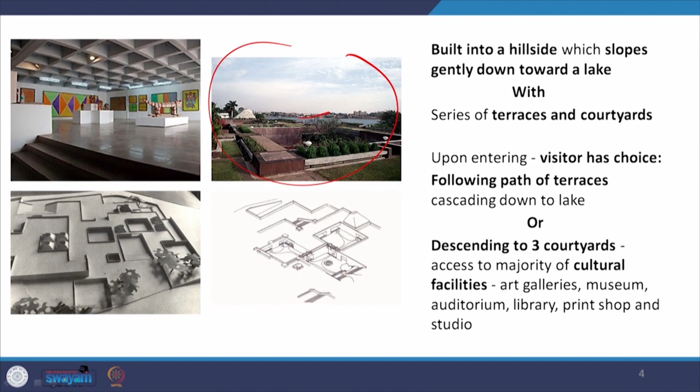Because he will have to bring in levels in his building, he will have to create that sight and view of the Bhopal Lake, as you see here in this picture out there in the distance, which is going to govern the design of the Bharat Bhavan. He is not coming to the site with an imaginary Bhavan in mind. He is coming to the site and then imagining the Bhavan that will fit onto this site.

Am I speaking the language of Frank Lloyd Wright? Am I not saying the house must be not on the hill but of the hill, that the building must respond to its location, its topography, its climate, its vegetation, its available materials? My design should not be a preconceived hypothesis. My design should be a result of the existing conditions that I see when I go see the site and study the conditions of that region. Then should the image of the design start floating in front of me. There is no doubt that all architects have some general idea of the building they want to do when they start thinking about it.

But it must be greatly tempered by all these conditions. And thus it was tempered.

Bharat Bhavan is an iconic building, so low key that it really doesn't even have a proper elevation. I've been trying to find one shot that would define the elevation of the building. It doesn't exist. It is just a series of levels interconnected, with sunken courtyards and terraces. That's all there is, and within that the entire Bharat Bhavan has been put together beautifully. There are a couple more projects of Charles Correa we reflected on earlier, which are the predecessors of this project.

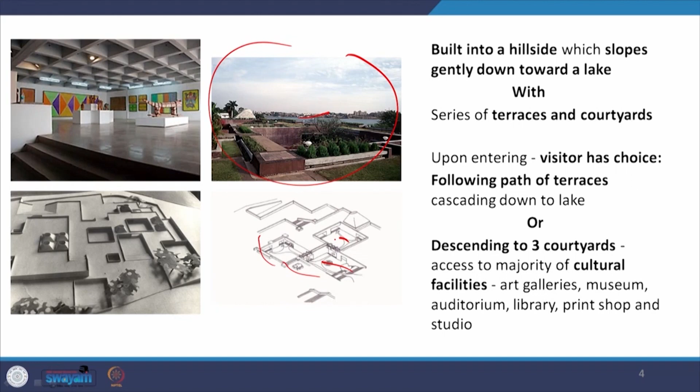Here the building is built into a hillside which slopes gently down towards the lake, creating a series of terraces and courtyards. Upon entering, the visitor has a choice: follow the path of terraces cascading down towards the lake, or descend into the courtyards to access the cultural facilities - the art galleries, museum, auditorium, library, print shop and studio. This is a picture of one of the sunken art galleries.

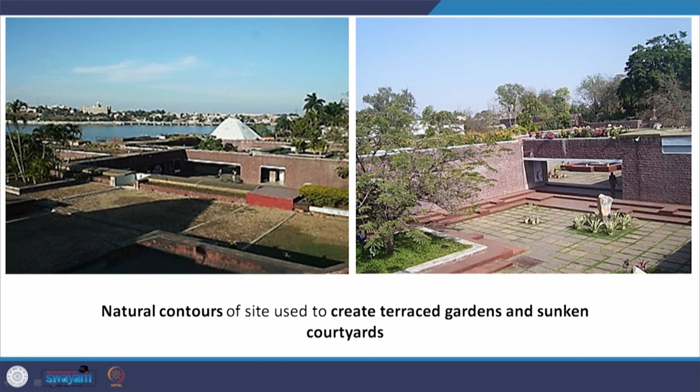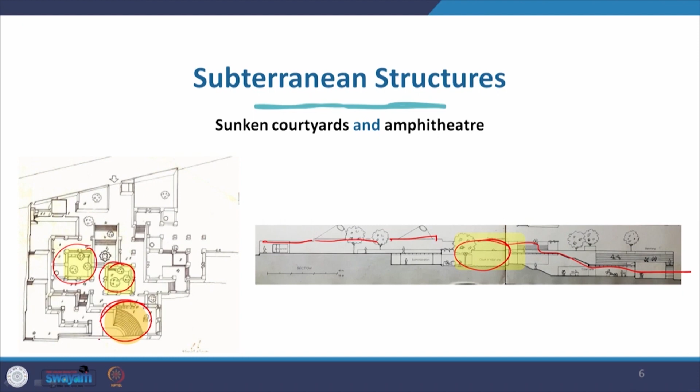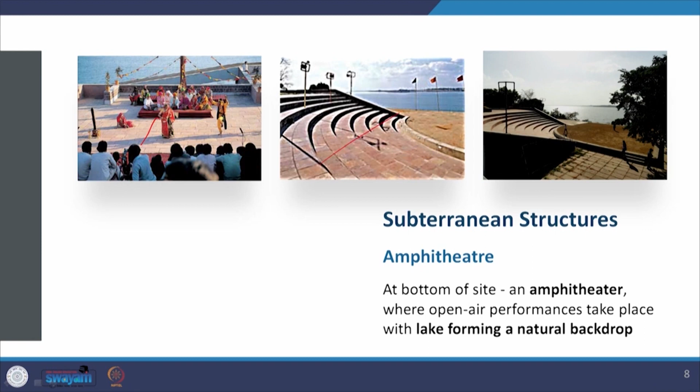The natural contours of the site were used to create these terraced gardens and sunken courtyards - a terraced garden looking down into a sunken courtyard. Looking at the subterranean structure of sunken courtyards and a sunken amphitheatre in section, this shows the sunken courtyard and the terraces you follow going down towards the lake. In plan, these are the courtyards and the amphitheatre, which you see on site with a play going on, looking towards the lake at the bottom of the site, with open air performances taking place and the lake forming the natural backdrop.

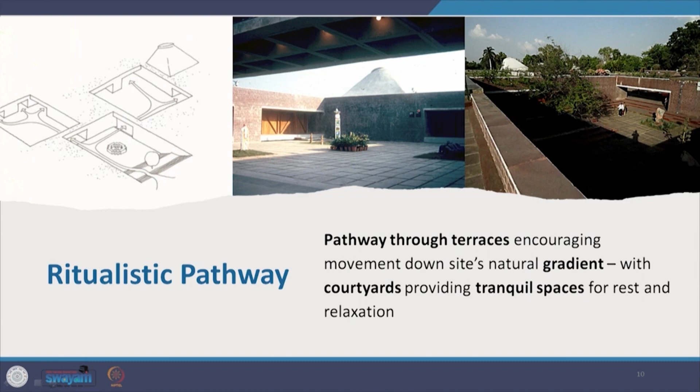These are the galleries that open up from the sunken courtyards. There's also the idea of the ritualistic pathway - as I discussed in previous lectures, Charles Correa uses the pathway movement of a temple, palace, or village, that ritualistic movement, to create movement within his building. I mentioned an earlier museum where he used this concept. Here too, the pathway runs through terraces, encouraging movement along the natural gradient of the site, with courtyards along the way providing tranquil, relaxing spaces to sit and rest.

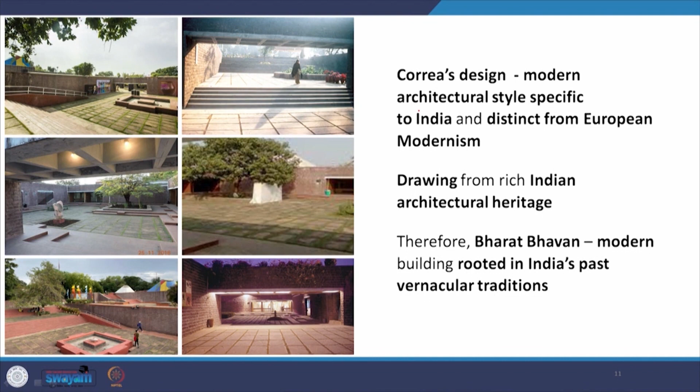So Correa's design is a modern architectural style specific to India, distinct from modernism for Europe - this is modernism for India. It draws from India's rich architectural heritage. Bharat Bhavan is a modern building rooted in India's past vernacular traditions - open spaces, courtyards, terraces, the chhat and the angan - all playing their role. It is well suited for contemporary society, with familiar architectural motifs responding to the man of the 80s, while taking significant steps toward a distinct Indian modernism. These are some of Correa's other buildings.

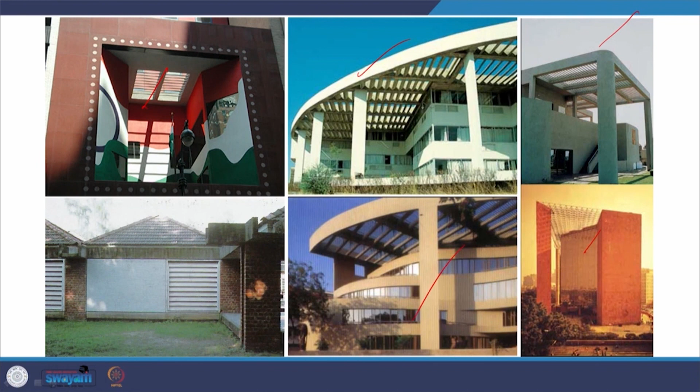This is the consulate building he did in New York, which I have studied with you. This is in Mauritius, this in Bangalore, this is IIT Delhi, and this is the Gandhi Smarak Sangrahalaya.

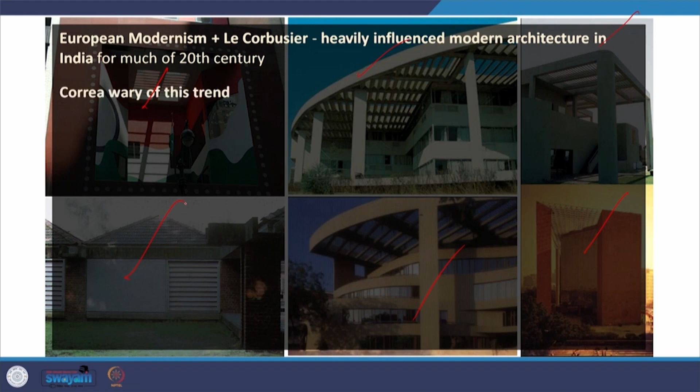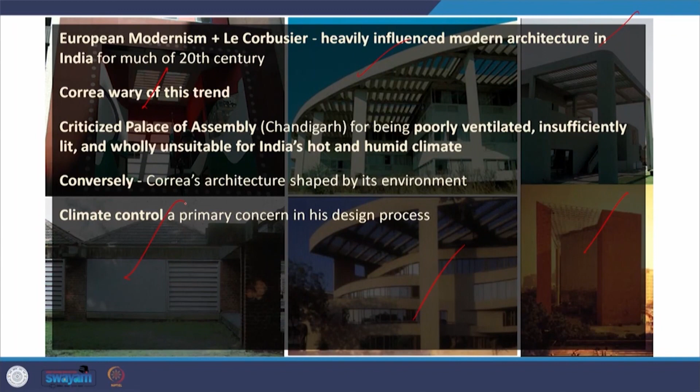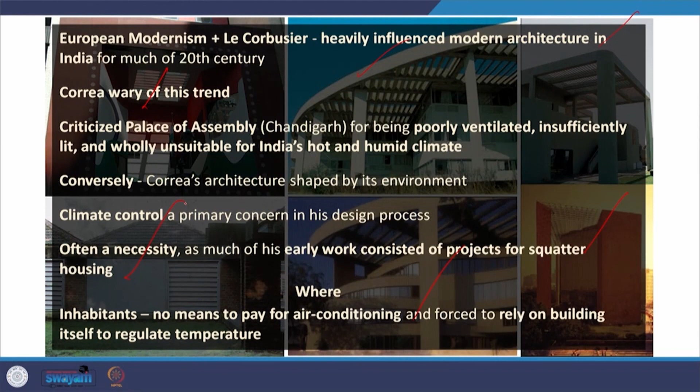But the important point is this: European modernism and Corbusier heavily influenced modern architecture in India for much of the 20th century. Correa was wary of this trend. He criticized the Palace of Assembly for being poorly ventilated, insufficiently lit, and wholly unsuitable for India's hot and humid, or composite, climate. Conversely, Correa's architecture is shaped by climate and environment - climate control is of primary concern in his design process, often a necessity, as much of his early work consisted of projects for squatter settlements, where inhabitants have no way to pay for expensive air conditioning and must rely on the building itself to regulate indoor temperature.

This idea was not restricted only to squatter development. Whether he designed the Ramakrishna house or the Parekh house for the rich, or the Kanchanjunga apartments for high income groups, he resorted to the same passive techniques to make houses thermally comfortable without dependence on air conditioning. Was air conditioning still used? I believe so, but not to the extent it would have been required had these principles not been applied.

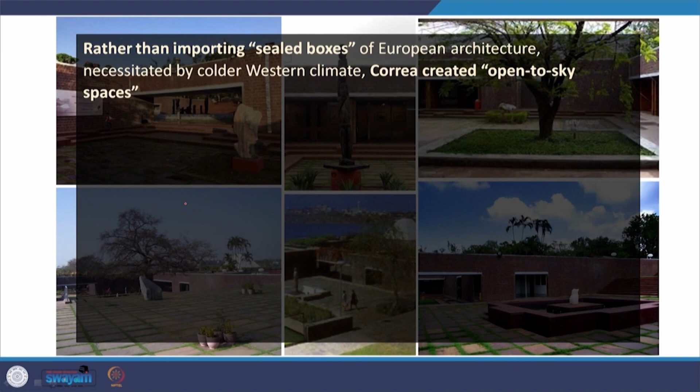Rather than importing sealed boxes of European architecture, which was necessitated by the Western colder climate, Correa instead wanted to create open-to-sky spaces so vital in India. I do not know whether the young generation gets to see these open-to-sky spaces in the upcoming urban centers of India, but when I was growing up, when I saw Delhi and other places, I saw so many open-to-sky spaces deliberately created.

It was part of our lifestyle to spend evenings outdoors in summers and even in winters. When you go out to play in the maidan or the ground or whatever green space the city afforded, much of family life was spent in the veranda, on the terrace, or in the maidan, either early mornings or late evenings in summers. In winters also, there were specific times when we could spend time outdoors.

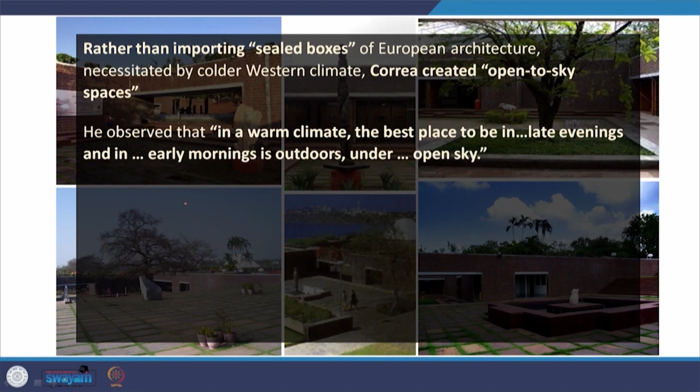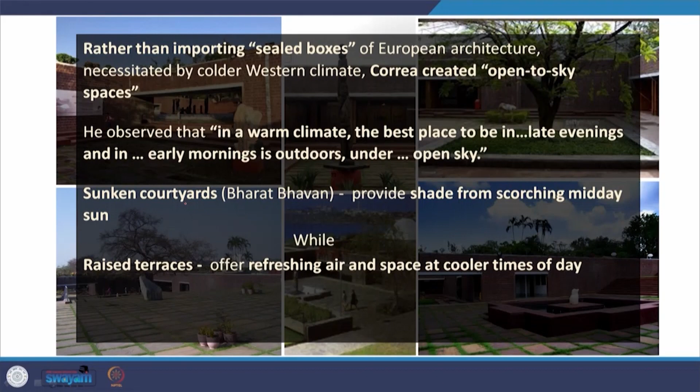He observed that in warm climate, the best place to be in late evenings and early mornings is under the open sky. Sunken courtyards, as you see in the Bharat Bhavan, provide shade from the scorching midday sun, while the raised terraces offer refreshing air and space at cooler times of the day—exactly what they were supposed to do in the various mohallas and gullies of, for example, old Delhi, where the chhat was the place people used to sleep at night.

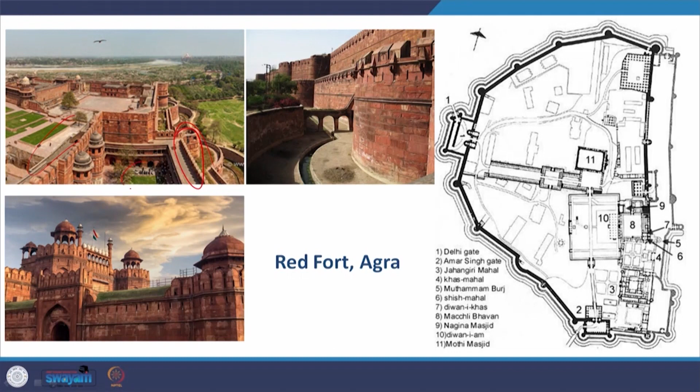This climate control solution in India's architectural history was inspired by the courtyards and terraces found even in the Red Fort. So when we go to the Red Fort, we find the same thing happening—terraces, courtyards, all these spaces being brought in because this was the vernacular response to the climatic conditions of the region.

Correa says there is nothing so moving as stepping out into an open-to-sky space and feeling the great arch of the sky or looking out towards the horizon. At Bharat Bhavan, it is intended that those emerging into the courtyard undergo this similar dramatic spatial experience of coming outdoors and being able to see the arch of the sky, particularly as the sun sets in the late evening.

The subterranean structures are not just confined to being symbols of passive comfort or spaces derived from the existing topography, which he allowed to continue in that manner, but also because of using the mandala form in creating these sunken courts.

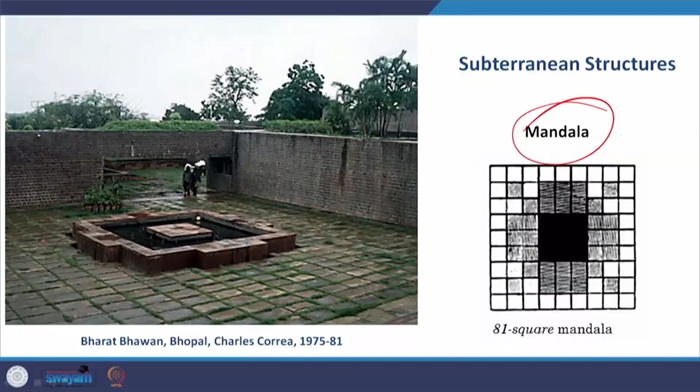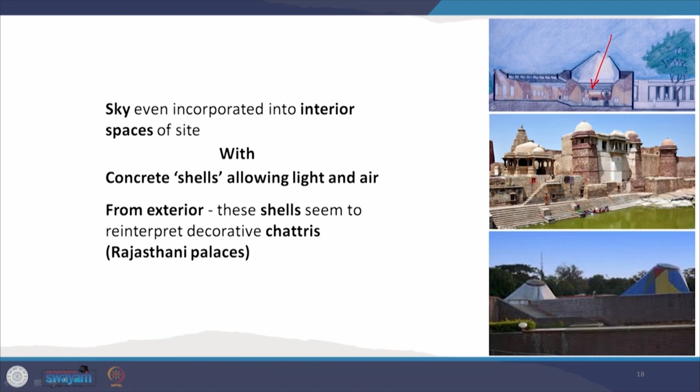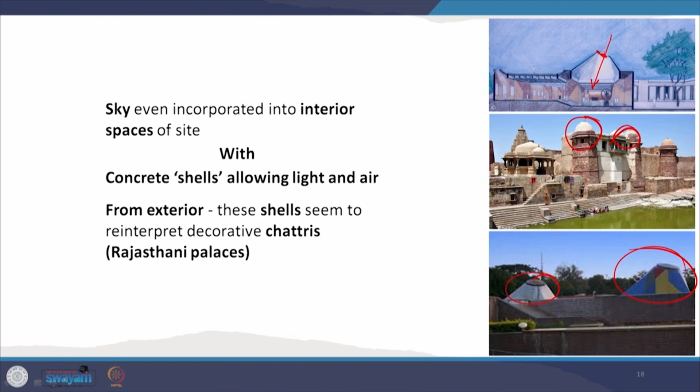The sky is even incorporated into the interior spaces of the site, pulling daylight into the deep interior areas through these concrete shells placed over the terraces, allowing light to filter into the deep areas. From the exterior, these shells are actually a reinterpretation of the Rajasthani chhatri, the only difference being this has an oculus, an eyepiece, to pull the light in.

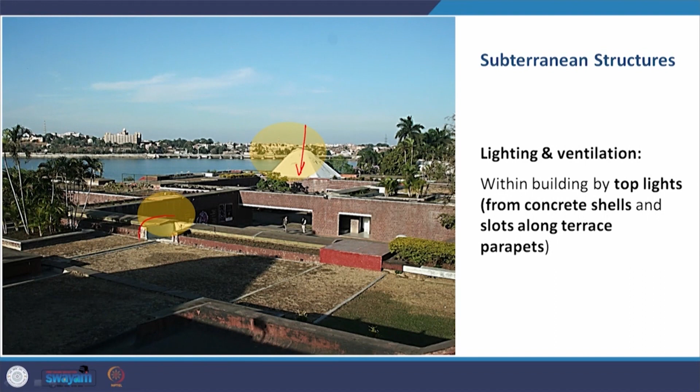So what we have for light and ventilation within the building are top lights from the concrete shells, and then there are small cavities, slots provided along the parapets of the terrace, which also take light deep inside the building below.

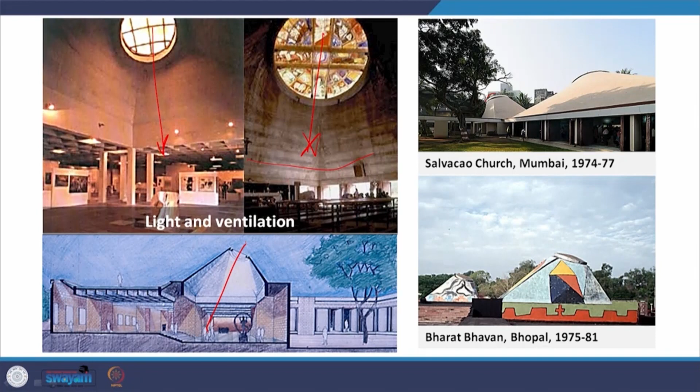From the courtyards, there are wide glass-panelled openings to ensure that the arts program displayed inside is accessible to all.

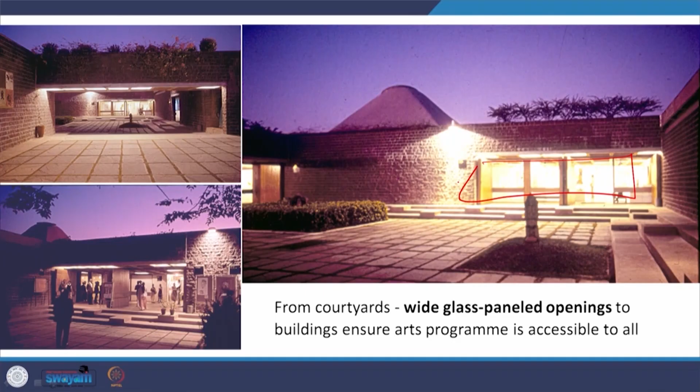The next project is on the other side of the climate spectrum. From composite climate, we move to the cold climate of Kashmir, with the Kashmir Conference Center by Joseph Allen Stein in 1984. This conference facility with a 325-room hotel adjoins the Dal Lake, whereas the earlier project adjoined the Bhopal Lake.

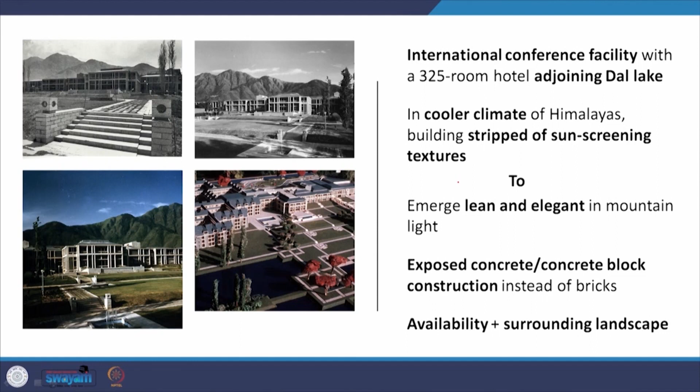In the cooler climates of the Himalayas, the building has been stripped of all sun-screening textures because we want the sun to penetrate the building. It is lean and elegant in the mountain light. It is made of exposed concrete or concrete block construction instead of bricks, which are not readily available in the mountains, but rocks are—reflecting the availability of material, with the surrounding landscape responding to this kind of material.

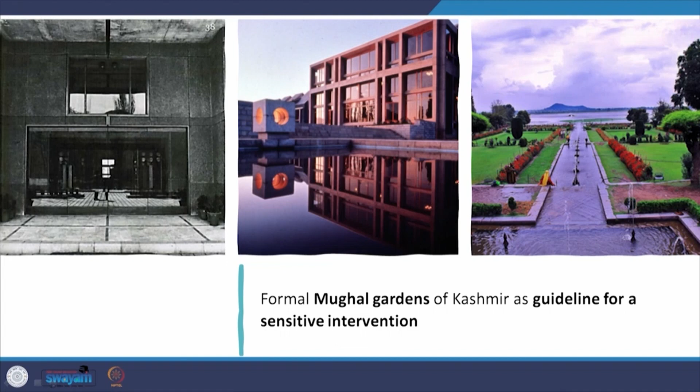The formal Mughal gardens, such as the Nishat Gardens of Srinagar, are a guideline for a sensitive intervention in Kashmir. But here again, he does not imitate them verbatim. Instead, he brings maximum sun into the building, something that probably Charles Correa or someone else wouldn't have done in a composite climate situation.

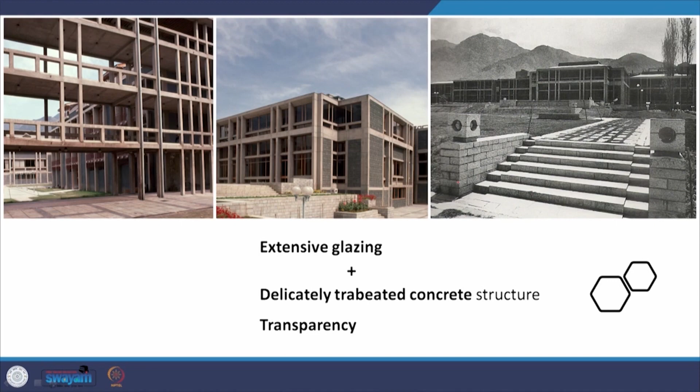He gives extensive glazing, a delicately trabeated concrete structure, and maximum transparency, all to pull in as much sun into the building as possible. Whereas in composite climate they were trying to keep out the sun and glare as much as possible, here climate changes, conditions change, building changes—it's to pull in the sun.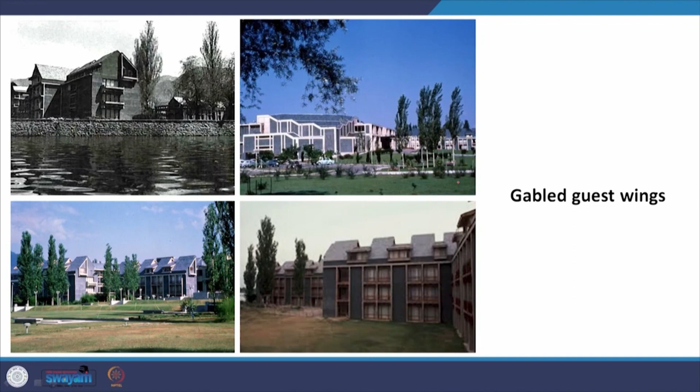Had it been an actively controlled building, I can say for sure the same building design of an active controlled building in Delhi could have worked equally well in Kashmir. The only difference being, from conditioning air for cooling, you can convert that to conditioning for heating. These are the gabled guest wings responding to the topography, the form of the mountains and hills behind.

Then we have this amazing composition in brutalism called the NDDB office building by A.P. Kanvinde in 1983. This is brutalist, but it is finished with white cement and rugged stone marble chip work. It is brutalist because it is rough cast work, an asymmetrical massing of blocks with receding irregular terraces as we go up.

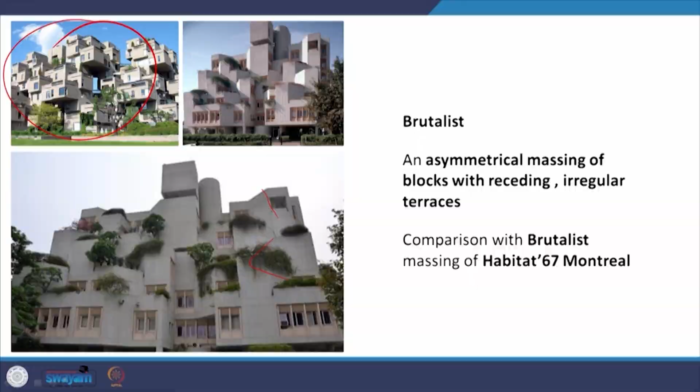The comparison of this brutalist work can be made with Habitat 67, Montreal, the project by Moshe Safdie—the housing project which also had a series of blocks placed asymmetrically over the entire composition.

This is an alternative to conventional office planning. The emphasis is on office worker amenities and an environmentally sensitive workspace. More exclusive functions than that of the chairman, the director's office, etc., are provided right at the top.

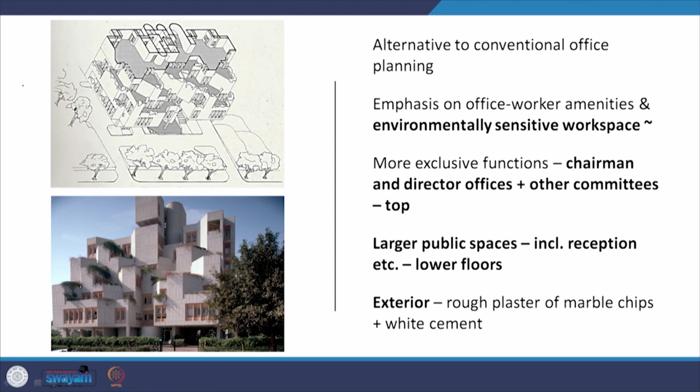The larger public spaces, including reception, etc., are on the lower floors, and the exterior is rough plaster of marble chips and white cement. The vertical services provided at the back of the building are kept separate—the fire escape, the main stairs, the elevator towers.

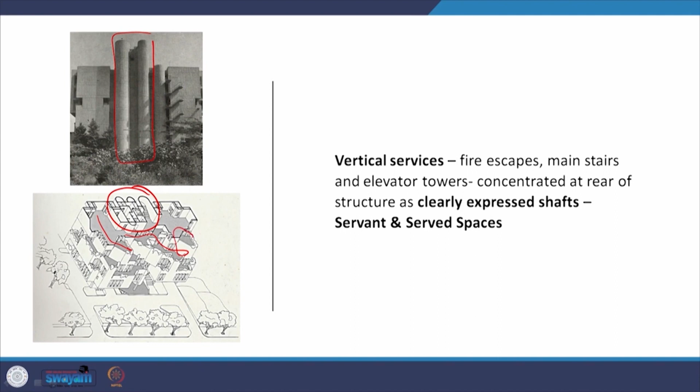So the served spaces and servant spaces are clearly defined. If you look at the plan—this is isometric here—you can see the servant spaces and the served spaces. So the ideology of Kahn, of servant and served spaces, also comes into play in this building.

Irregular terraces with hanging gardens have been provided, as you can see in this picture. These are the various hanging gardens of the irregular terraces. This is the view from above, showing these gardens.

This same idea of hanging gardens was later applied in 1997 by Norman Foster in the Commerzbank, where he called them sky gardens. They were not so randomly organized. In this case they are more asymmetrically, more randomly organized, whereas in the Commerzbank building they were more symmetrically organized—but we have these sky gardens all the way up the building.

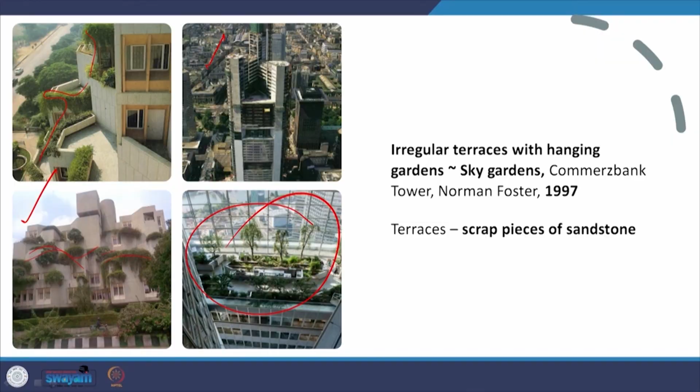I'm not saying he borrowed the idea from the NDDB building. I'm saying the NDDB building, the Commerzbank, and several others are part of the same chain of buildings that continue to apply vegetation even at higher levels. The idea of green roofs today, or gardens at high levels, are all precursors to an idea now firmly enshrined in our definition of what makes a green building.

Then we come to the Institute of Forest Management in Bhopal by Anant Raje, 1989. We are very close to the start of liberalization in India, and Anant Raje himself is one of the most talked-about modern Indian architects, a guru to several leading designers, and a great educator.

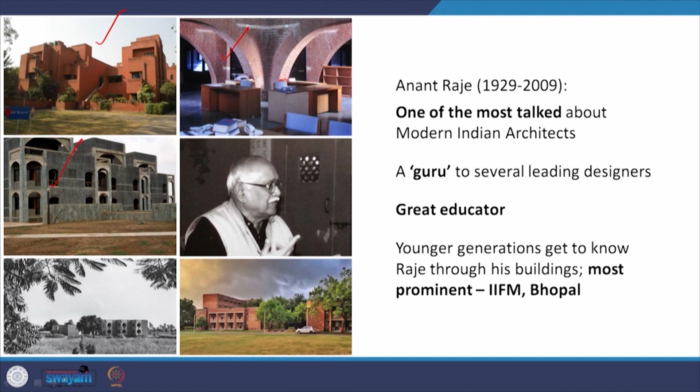Young generations get to know Raje through his buildings, the most prominent being the Indian Institute of Forest Management in Bhopal. So we have projects connected with housing—this is the MDC, the Management Development Center in IIM Ahmedabad, and this is the IIFM. There are other projects done by him in different places.

Here again, the site plays an important role—it is not leveled out, not neutralized, but used. It's a rocky site overlooking the Bhopal Lake, again as in the case of Bharat Bhavan. It is a combination of building and landscape.

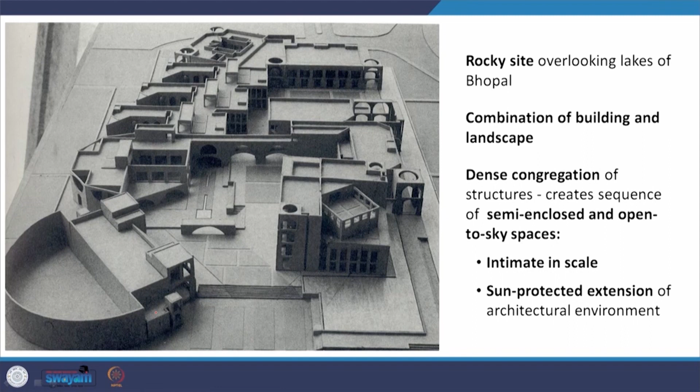Dense congregation of structures create sequences of semi-enclosed and open-to-sky spaces. They are intimate in scale, a sun-protected extension of the architectural environment. It is a large government project, as is Bharat Bhavan, as is the Kashmir Conference Center, and to a certain extent the NDDB building is also sponsored by the government.

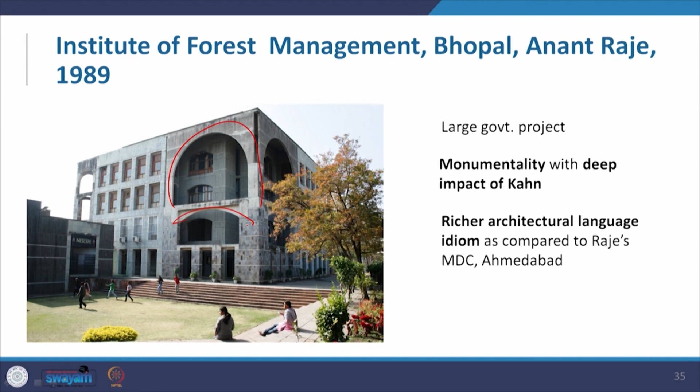In this case there is monumentality, but we see an overall deep impact of Kahn—for example, in elements like this, or in arches like this, all reminding us of Louis Kahn's IIM Ahmedabad. But it has a richer architectural language and idiom compared to Anant Raje's Management Development Center taught earlier, because this expands beyond just exposed brickwork to play with stone.

There is the idea of the palimpsest, the idea of the datum, the idea of the way forms have been created with a lightness of form he generates, instead of the heavy block massing he used earlier in the MDC.

The facilities are related to teaching, seminars, residences and recreation, and are set to promote an ecologically sound program for forestry. Being so, it is needed that the building itself has an ecological responsiveness.

The plan is resolved into distinct components. Some are repeated, some are tilted off the grid and are distinguished by their own geometry. For example, this one has a linear reflecting pool, as you see here, bordering the complex.

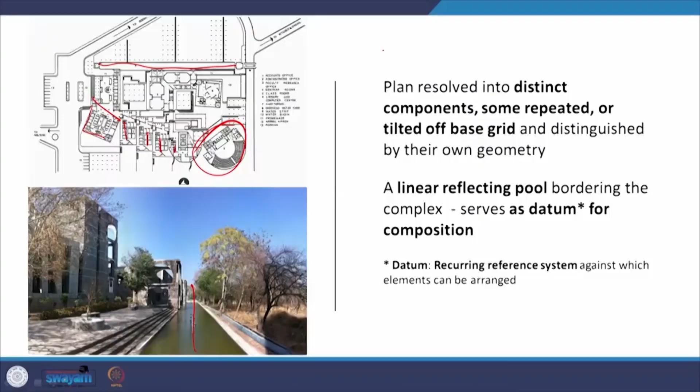It serves as a datum to the entire composition. Now, what is a datum? A datum is a recurring reference system against which all the elements can be arranged. For example, you can draw a straight line and all the elements you arrange in a project are aligned with this in some way. So it serves as a kind of reference system for aligning spaces together. In this case, this water body, which has other functions also, serves as a datum.

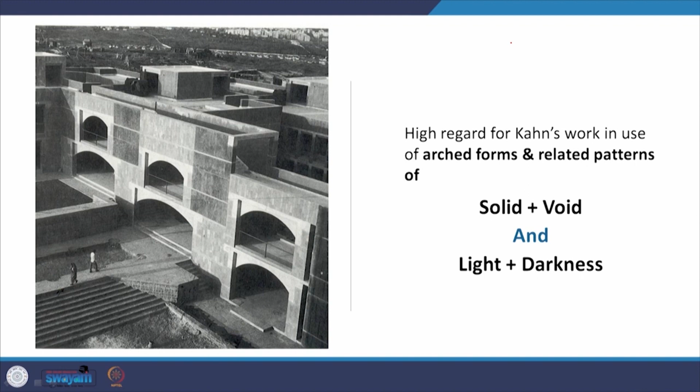There is high regard for Kahn's work in the use of arched forms and related patterns of solids and voids, light and darkness - coming from where? Straight from Louis Kahn. So we have this.

A historical influence is also there in IIFM Bhopal, from the ruins of Mandu, which are nearby. What does he gather from the ruins of the palaces of Mandu? Raje translated the ruins into contemporary structure, which were more delicate in mass and proportion vis-a-vis the Mandu palaces, but characterized by the bony, haunted quality of the ruin. This haunting quality of the grey stonework of the palace at Mandu is getting reflected here along the datum line, in these buildings that are placed here.

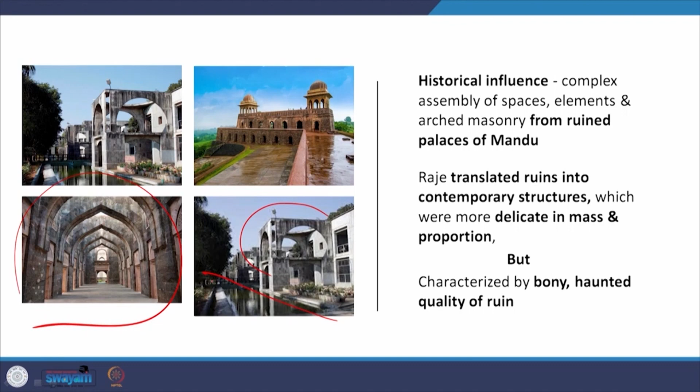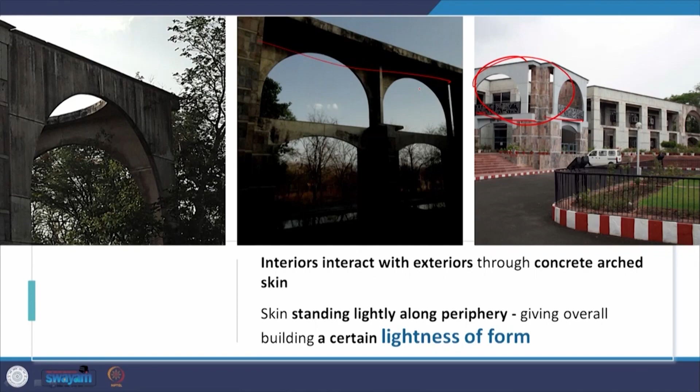Inside and outside, light and darkness is also a reminder of IIM Ahmedabad. Interiors interact with exteriors through these concrete arched skins. This skin suggests lightness of form - it sits very lightly along the periphery of the block, giving the overall building a sense of lightness of form. The building looks bare bones, with thin plates and thin members, and the way the sun filters in from the round openings at the top.

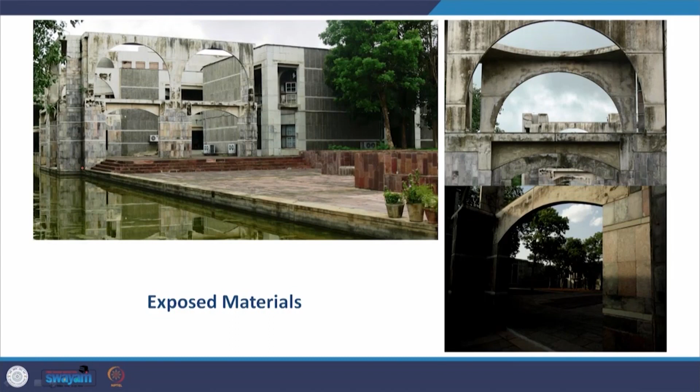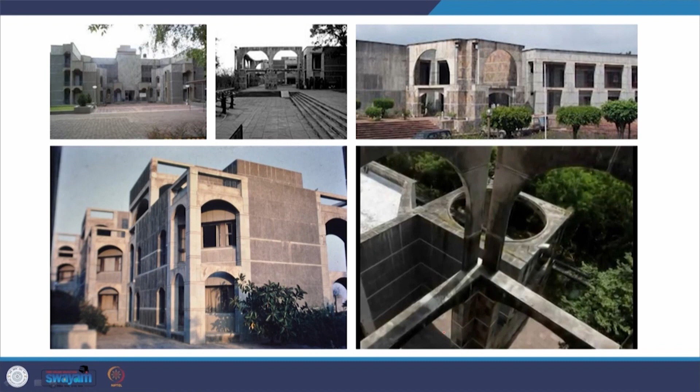Intimate courts are there, exposed materials are there, an entrance gate is there. Let us take, for example, all these points in one building - the mess building. We have the lightness of form, the monumentality, the exposed materials, the play of water, and Kahn's arches all coming together. These are some of the other images of IIFM Bhopal.

You can again see the lightness of form, how delicately this concrete panel has been supplanted over this, the beam below it, and these.

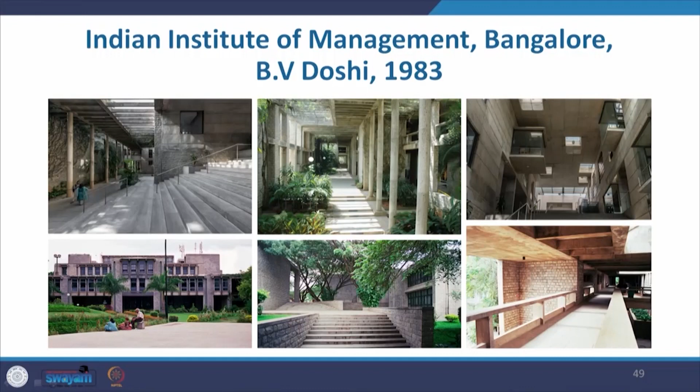So we have essentially seen a series of iconic projects, but there are so many more - there's no end to the amazing work done by many architects. Some other important projects you can study in more detail are the Indian Institute of Management in Bangalore by B.V. Doshi - light and shade, use of raw concrete with exposed stonework, greens and blues, an amazing mix of complex spaces, so rich in their architectural language.

We can look at that - this is IIM Bangalore, and the greens of IIM Bangalore, the shaded areas.

And then there is the India Habitat Center in New Delhi by Joseph Allen Stein, 1993. In fact, the interlinked shaded courtyards of Fatehpur Sikri and that of India Habitat Center relate to each other. If this is the Fatehpur Sikri interlocking building blocks, these are the building blocks that you find in the India Habitat Center.

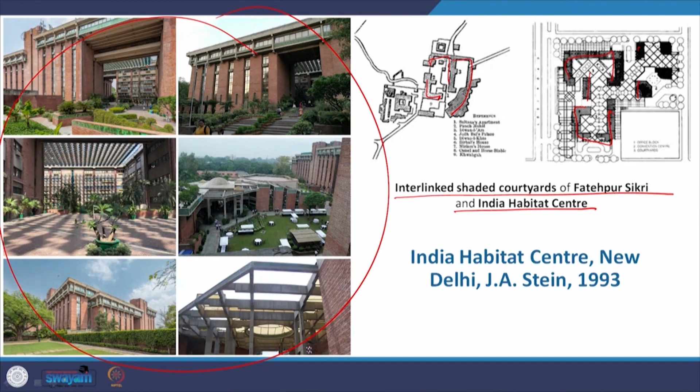And these are the various views of this amazingly beautiful exposed brick and concrete construction, with that massive court in between - monumental in height, human scaled because of the series of floors on either side, very similar to the idea he tried in Ford Foundation. It is covered with this amazing louver at the top, and the entire space comes alive even in the daytime, even when it's hot, because of the greens and blues implanted in that court area. These are the interior spaces of the India Habitat Center in Delhi.

So I'll close here - we have covered a huge range of buildings by various architects and how they responded to the context of critical regionalism. I do hope this will have opened up a direction for you to look and search for more.